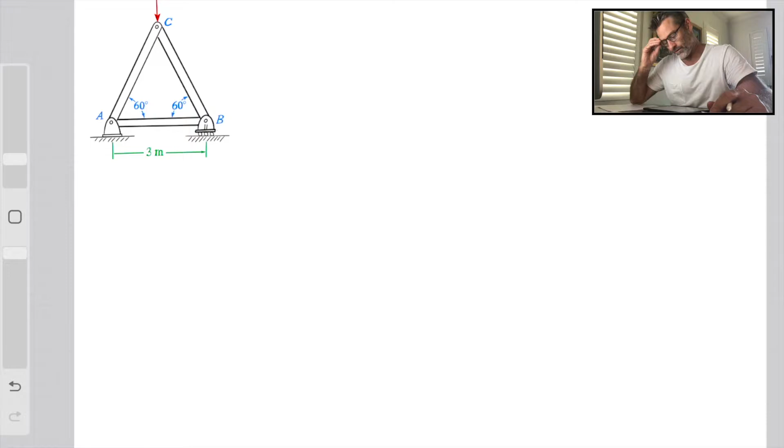G'day all, I've got a question regarding method of joints that I'd like to share with you. Method of joints is just one of those things that it's a process, and if you overthink it, it can become complicated, but if you break it down into steps it's relatively simple and straightforward.

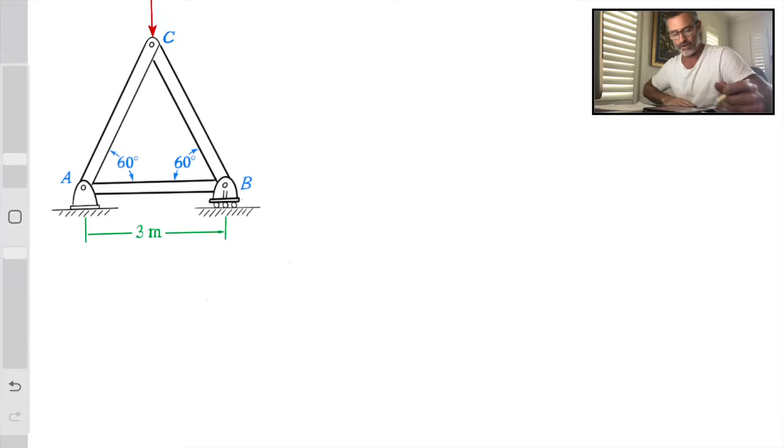I encourage you to just follow the steps that I do when I go about solving these truss problems. The very first thing we do whenever solving these problems is draw a free body diagram. I prepared one here a little bit earlier, so I'll throw that up. And here's our free body diagram.

You can see that we've got the external forces of the truss, BY, AY and AX, and we also have the force from up above, that 3 kilonewton force that's coming down on the center point at the top of the apex of the truss there.

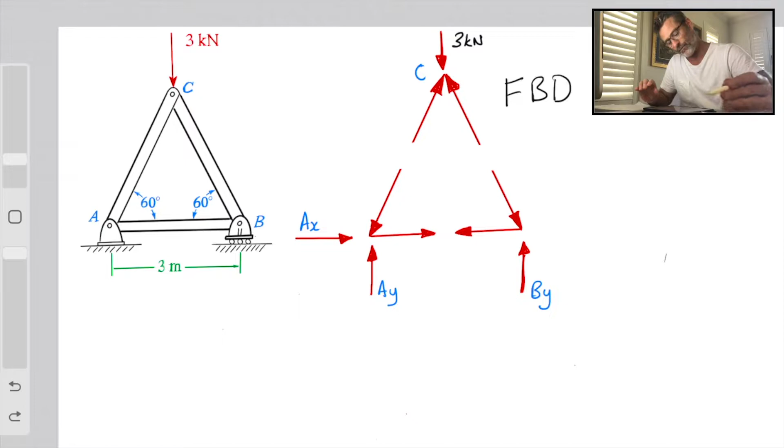But then we've sort of educated guessing, I suppose, what the internal forces of the truss might be doing. If we just have a look at this 3 kilonewton force coming from the top section here, it's pretty easy to identify, well, there must be these other forces here that are pushing back up to counterbalance that, because remember, when we're talking statics, we're talking about equilibrium, nothing's moving, and so therefore if we don't have these counteracting forces, we're going to get movement, and we don't want movement in a static structure.

That's quite important. Coming back down, looking here, we've got our support reactions that come from these supports here. Those support reactions, obviously they're going to be pushing back up, because if we've got the force of the truss, that 3 kilonewton force and other forces pushing back down, then we're going to need these forces here pushing back up in order to maintain that static equilibrium.

I can fairly well assume that we are going to have the forces here going in this upward direction. Coming across here, looking at AX, we see here that we're going to have this pinned joint here, or the pinned support reaction, this fixed support reaction. It's going to have that X and Y force locked.

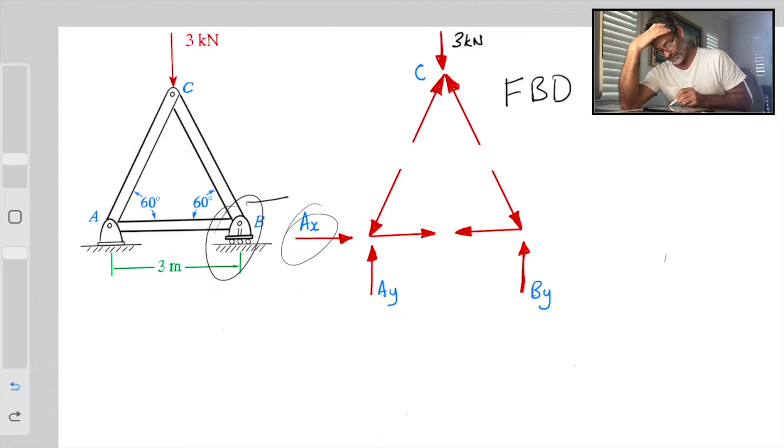When you come over to this one here, we're going to see the B reaction. It's a roller support, so therefore it's going to be allowed to move in this direction and back in that direction. But we are going to have that Y component, or that Y force, that's going to be pushing back up in order to keep it from falling over, or causing some type of catastrophe. So that's what we've got going on.

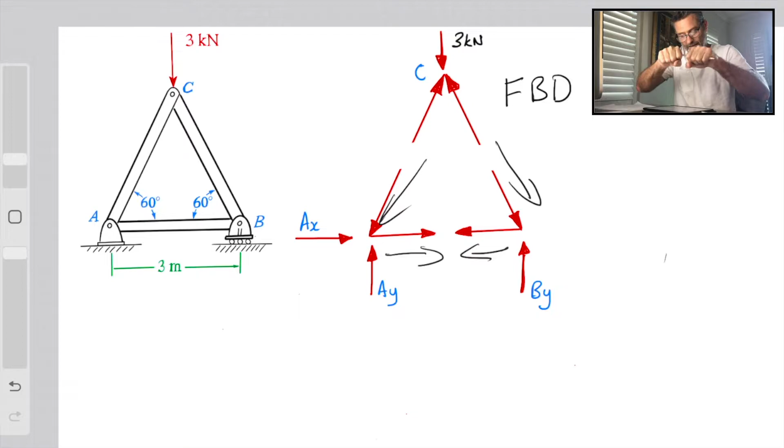And I would think, looking at this, if we have a triangle with forces pushing out here, then you're going to need some sort of tension force here to hold that bottom chord back in, to keep it from spreading apart. And so I've assumed that that's the direction.

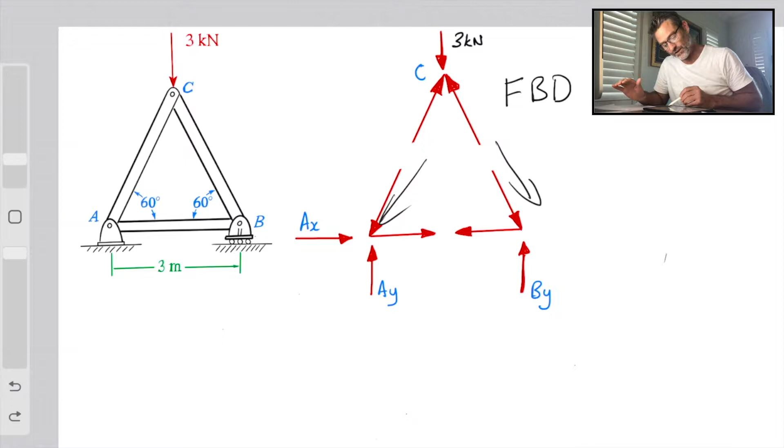Now, if by chance that wasn't to be the direction, that's no big deal, because if we get a negative in the answer, then we know that we just simply need to switch the sense of that direction back around the other way. But I'm fairly confident, looking at this, that that's the way the forces will be acting in this truss.

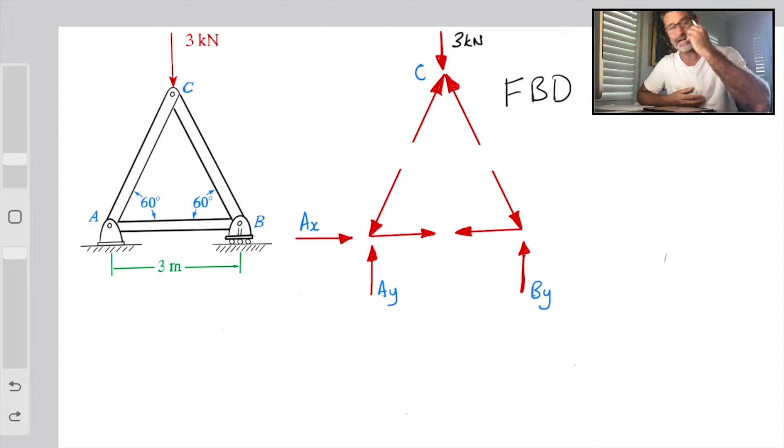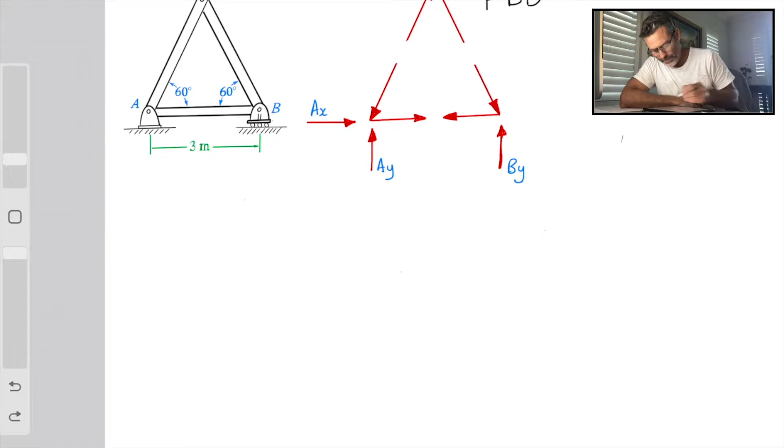Okay, so let's start. We'll go forward now as we're resolving what the support reactions are. That's a pretty straightforward process. So what we're going to do is take moments about point A.

So we're going to sum the moments. I'm going to call it in this positive direction of moments around point A, and we know that it's a static structure, so therefore it is going to be all equal to 0. Okay, so that's pretty easy, that little bit. Now it's doing our moment solutions.

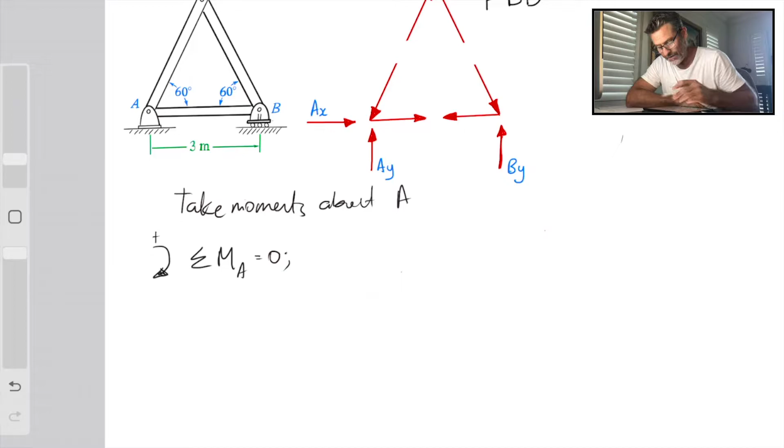We see that we have this force. We can see we've got this 3 kilonewton force up the top here that is acting halfway. So we've got 3 meters across the bottom there, in that bottom chord section. We've got that 3 kilonewton force which is acting halfway along that, which is going to be naturally 1.5. So what I'm going to do here is go, okay, well, we've got the 3 kilonewtons multiplied by our 1.5 meters, and that is going to be causing a positive moment.

Why is it causing a positive moment? Because this is pushing down past here and it's forcing it to go around that way, just like our direction of the arrow symbol that we've put up there. So that's going to be positive.

So I'm going to go minus BY. Again, force times distance is our formula for solving moments. I've got BY multiplied by 3 meters, because that's 3 meters from A that we are taking the moments around. We are going to come up with BY multiplied by 3, and then we have that 3 multiplied by 1.5.

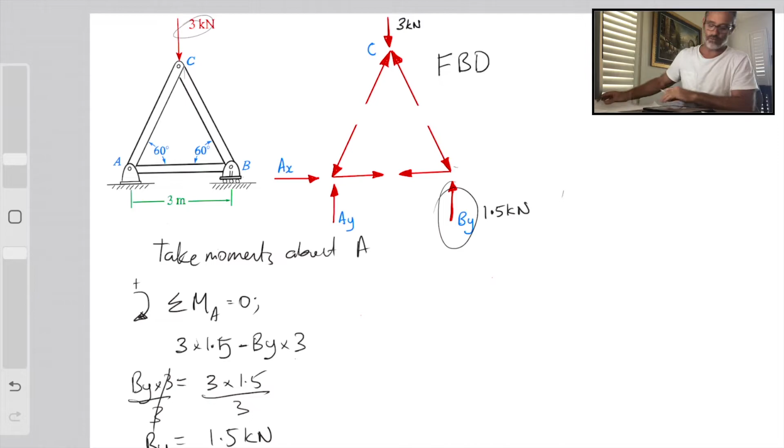Good. Okay, well how then do we come back and solve AY? That's fairly straightforward. We're just going to sum the forces in the Y, our second equilibrium equation. Sum of the forces in Y equals 0. We're simply going to grab our AY, because we're including all of the external vertical forces now. We're only working on the reaction supports.

That's why we're summing just the vertical forces, because obviously we've got this AX here, but that is going to equal 0, because there are no other external forces countering it. So it must be 0. So sum of the forces in Y are going to equal 0.

That means we are going to have AY minus 3 kilonewtons plus the 1.5 kilonewtons. Throw that back around the other side, and we get AY equals 3 kilonewtons minus 1.5 kilonewtons. AY equals 1.5 kilonewtons. So now I've got this one as 1.5 kilonewtons as well.

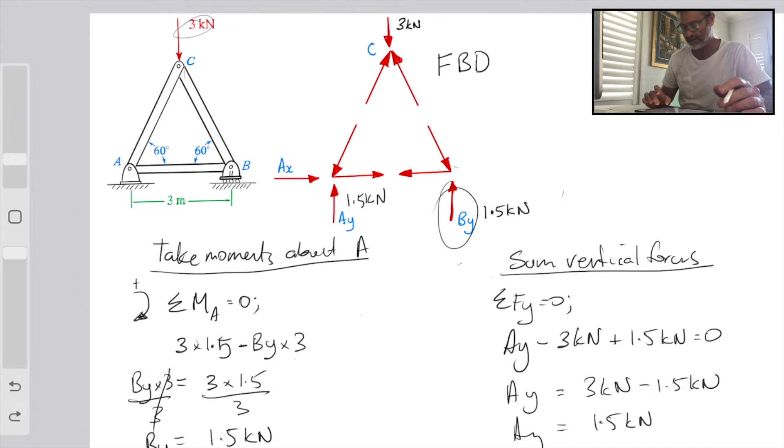And that makes sense, because up the top here you've got 3 kilonewtons pushing down, so the forces pushing back up should be equal to that 3 kilonewtons pushing down. From here on, we know AX is going to equal 0, so we're just going to ignore that, we don't need to consider it any further. But we do want to start solving the internal forces of the members themselves.

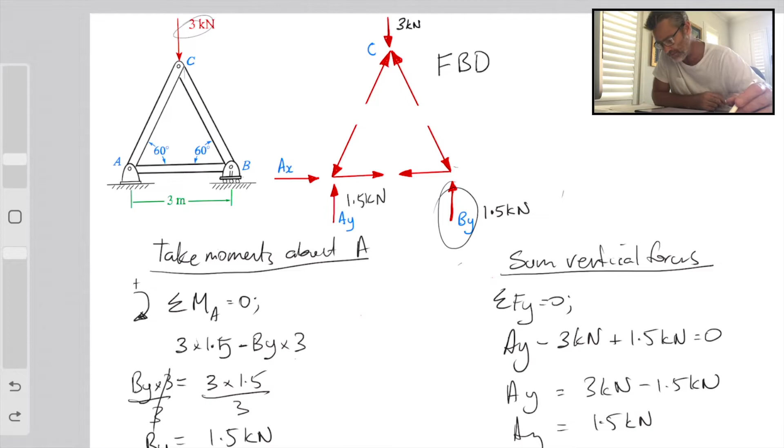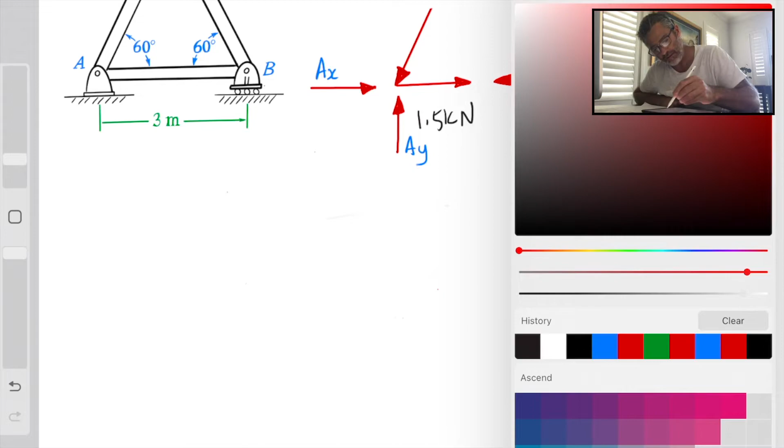Now we've solved those support reactions, we want to go through and solve each of the joints. That's a fairly straightforward process. The first thing I like to do when doing any of these joints is to simply draw my X and Y axes and label where the joints are and the forces are. It just makes it a little bit easier to solve.

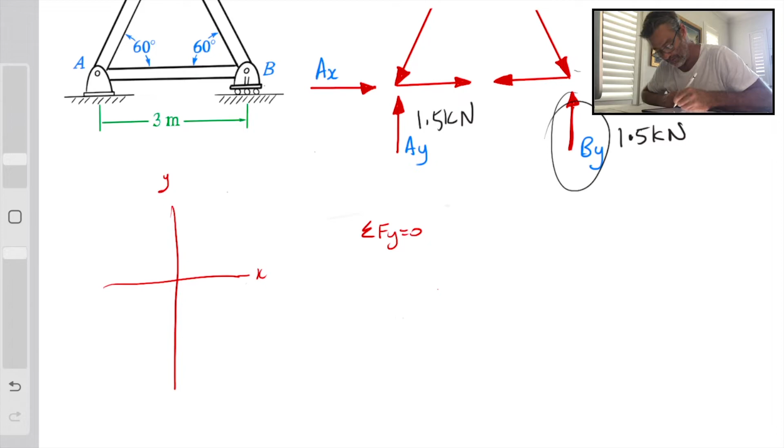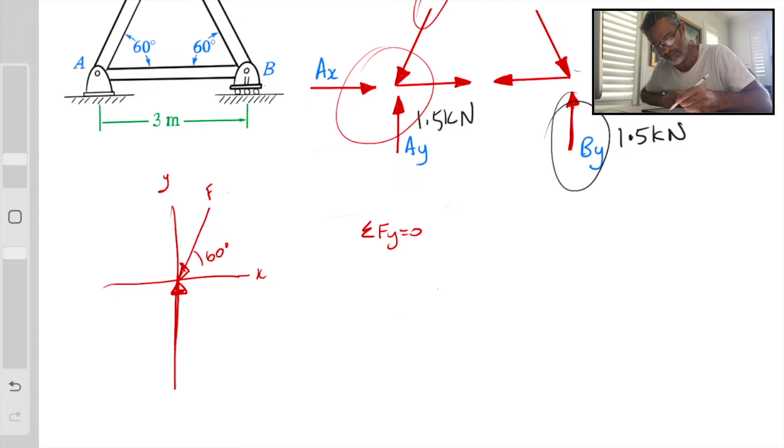So we've got the sum of the forces in Y equals 0. We may as well start with that, because when I look down at this joint A, these are the forces I've got going on: this coming in at 60 degrees. Now that is going to be called FAC, because that member here is A down the bottom and C up the top, so I'm going to label it FAC.

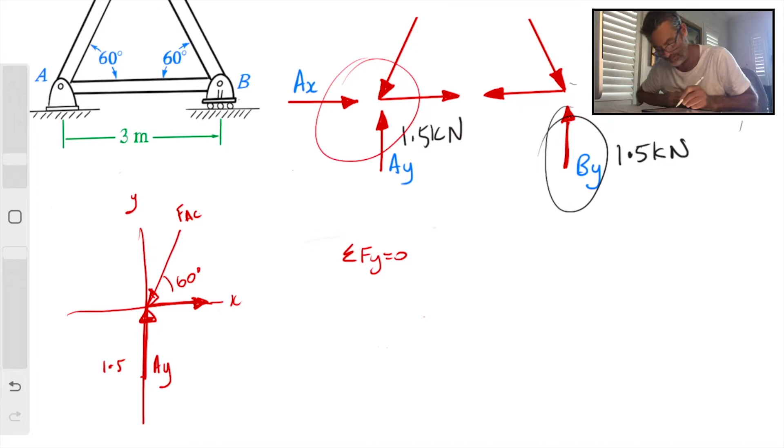This one here, drawn just a moment ago, is AY. We know that is 1.5. And then we have the other force pulling in from the joint, and that is going to be FAC force. The reason we're starting with FY is we already know this Y force, so it's not too difficult to calculate the only other force that has a Y component.

So how do we go about that? Well, it's straightforward as well. We are going to go 1.5 pushing back up, so I've got 1.5. Then I need to take away this FAC, because it's shooting back down, it's in a negative direction. I'm going to take FAC, but only the Y component of that FAC. It's important to recognize that.

So because I'm just taking that Y component, because I'm working in Y here, what I will do is FAC sine 60. Remember, if I'm trying to find a force component and the angle is not between the force component, that is this Y component, and the force itself, then we are going to use sine.

Now, if the angle was here, it's pretty easy to work out. We could say, well, obviously this is 30 degrees here, and if it was here, we could cos that 30 degrees. We'll take it as if, no, there's nothing there, we won't do that extra working out. We'll just simply say there's no angle here. So because there's no angle between the force and the force component we're trying to find, we are simply going to sine it. So 1.5 minus FAC sine 60, and that is all the forces we have in the Y direction.

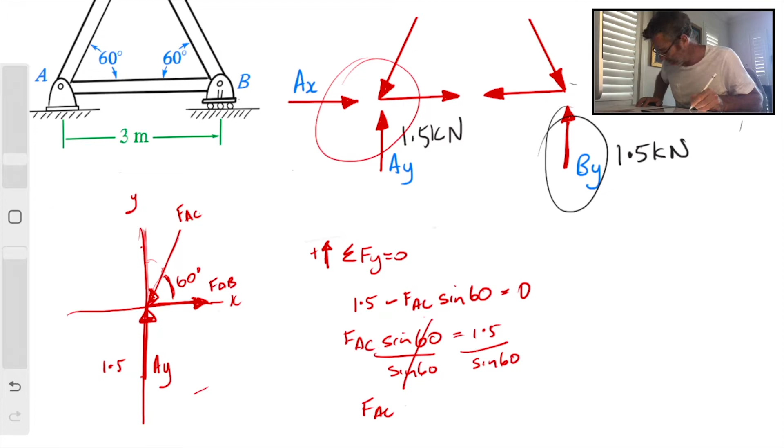FAC is going to equal 1.732 kilonewtons. So straight away, I can write in FAC here. This one is 1.732. Is there anything else we need to solve?

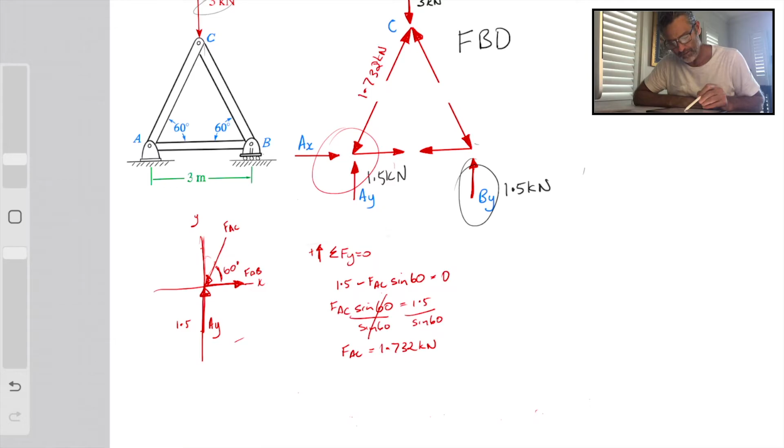Yes, there is. We want to solve the x components as well, so that means we're going to find out what FAB is here in a moment. Sum of the forces in the x equal 0. There's two x forces: FAC cos 60, because it's coming down at that angle, at that 60 degree angle, and we're going to cos it because it's pushing back that way. That's going to give us the x component of that angle.

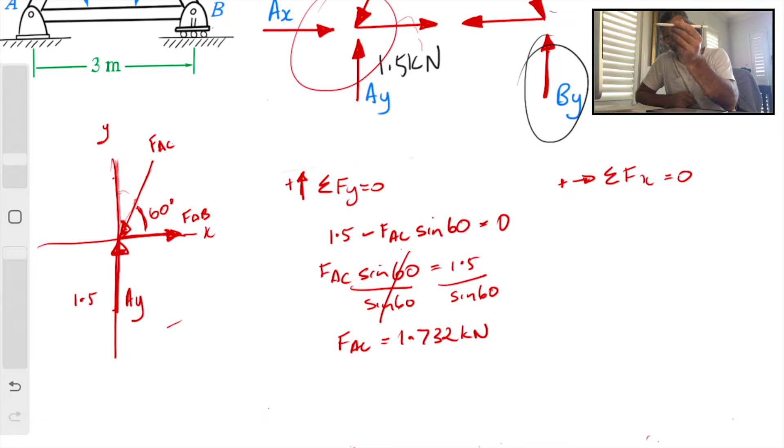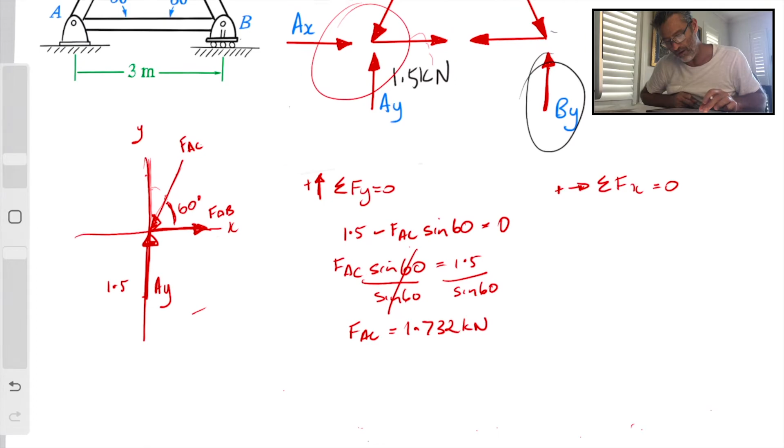Because that's pushing out towards the outside of the truss, the internal member must be pulling back in to counteract that. So let's go ahead and do that. FAC, we now know what FAC is, and that's 1.732. So we'll go 1.732 cos 60, and since it's pushing back in the negative, make sure we put that negative in there. And then we've got FAB pushing in the positive direction, so that's going to be positive.

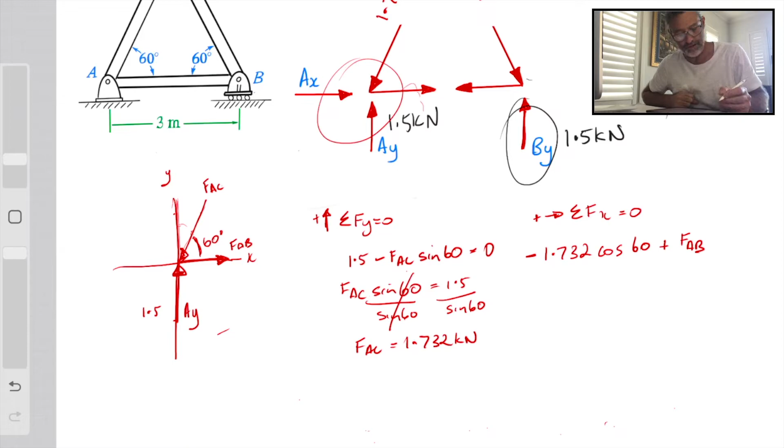So what do we do? We simply put FAB out in front, throw all this over the other side, and we will have our answer. FAB is going to be 0.866. Simple as that. Come back up to the top here, just write this in: 0.866.

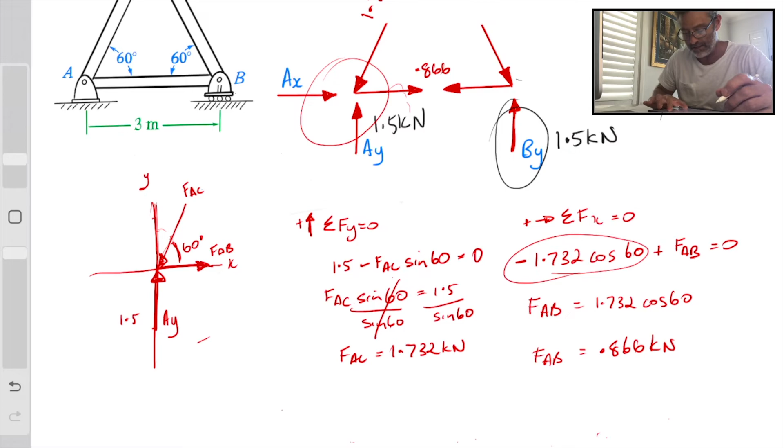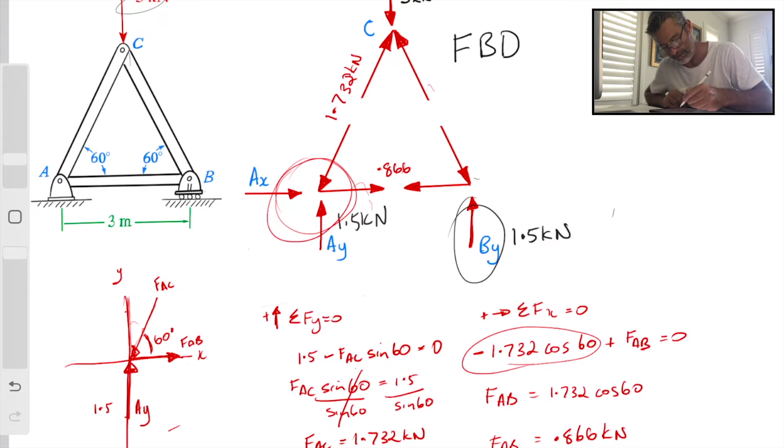So looking at this now, all we've got left to solve is this member here. This is just joint A we've been at so far. Let's tick that, that's done. We can now come down and do joint C. You're going to see that with this problem, we're actually going to solve it without having to visit that last joint, because we're going to be able to get all our workings from looking at joint C.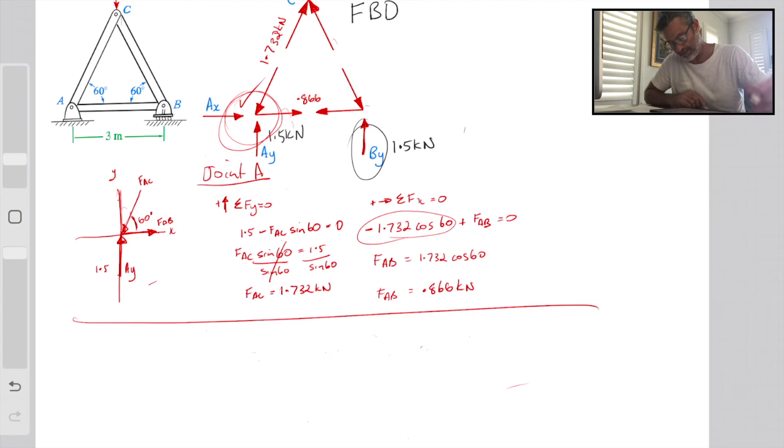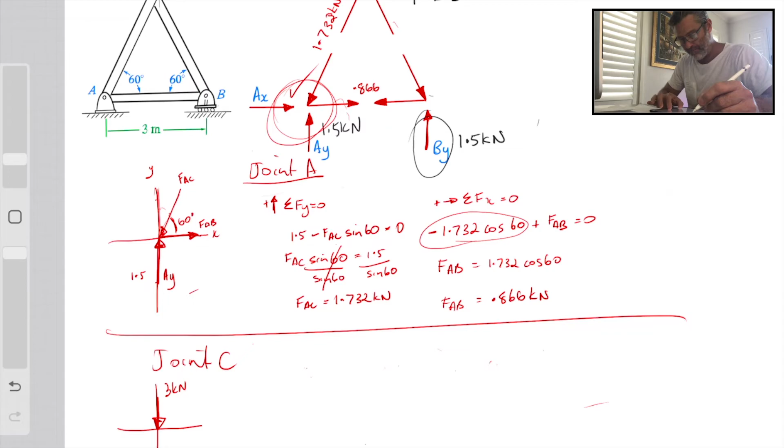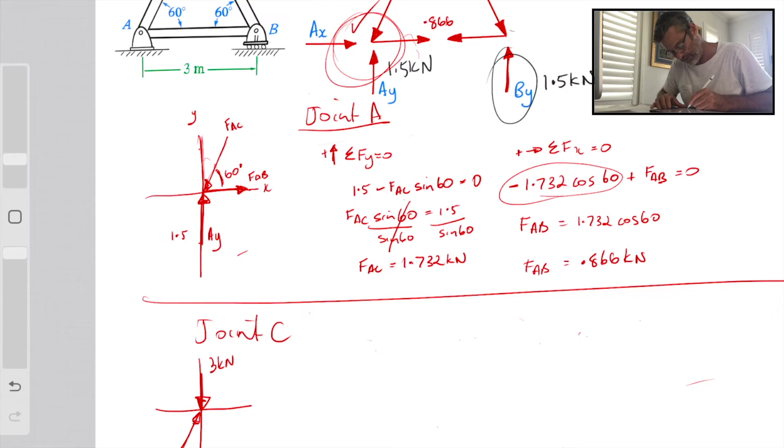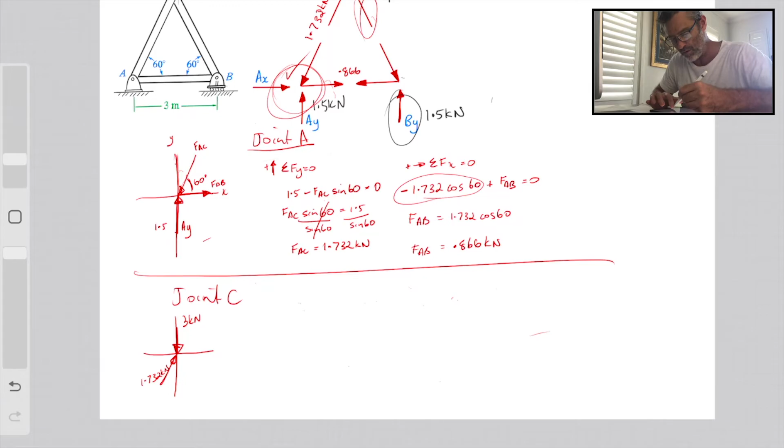So let's get our joint C, put our little x and y in. This one coming down here is 3 kilonewtons. The FAC is coming up like so, and that is 1.732. Then the last one we have is going to be this one here, which we can call FBC. FBC is going to be pushing back up in order to counteract this 3 kilonewtons pushing down, so FBC is coming back up.

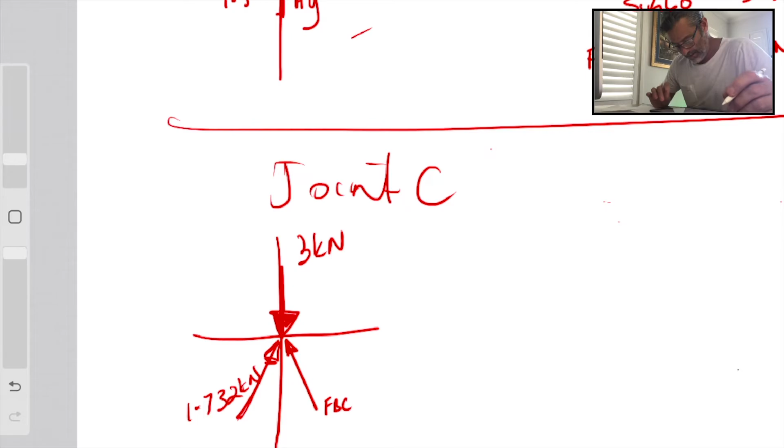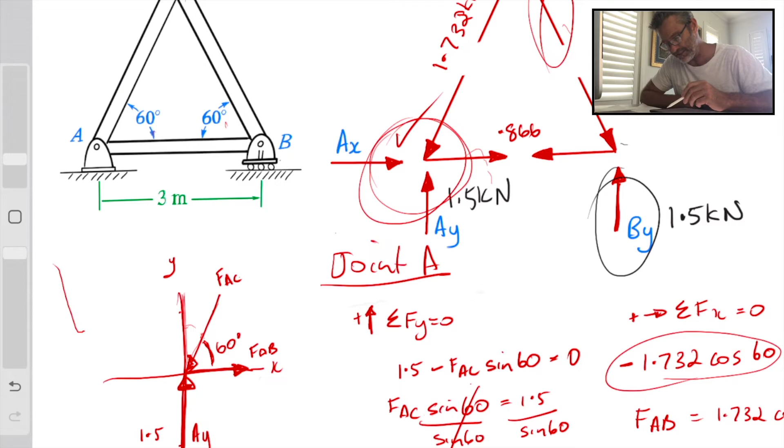Now, we're told we've got 60 degrees here at A and B, and obviously for the triangle's 180 degrees, we know that's going to be 60 degrees up here as well. This whole lot's 60, but if we're working just on this section here, it's half of that, so we've got 30 degrees we're going to be concerned with. I'm just going to write in there 30 degrees.

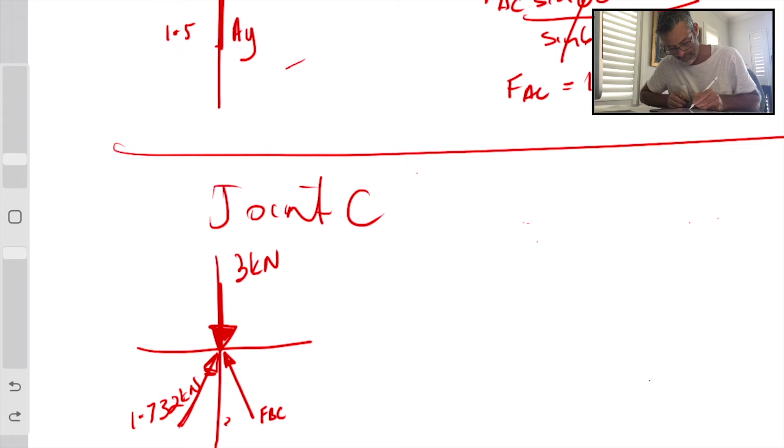We might as well go and find our vertical components. So let's sum, remember positive, sum of the forces in our y equals 0. We're going to come through adding all our forces together: 1.732 of this one here, but that's going to be cos 30, pushing up because we're only after the y component. So cos 30. Then we're going to minus 3 kilonewtons, that's coming straight down, so we don't have to sine or cos that one.

And then we come across to FBC, and that is going to be positive y because it's pushing in that positive y direction, plus FBC cos 30. Because we're going to bring that FBC back to that point, we want to find the y component of that FBC that is entirely on that y-axis, and so that's why we cos that 30, and then that's going to equal 0.

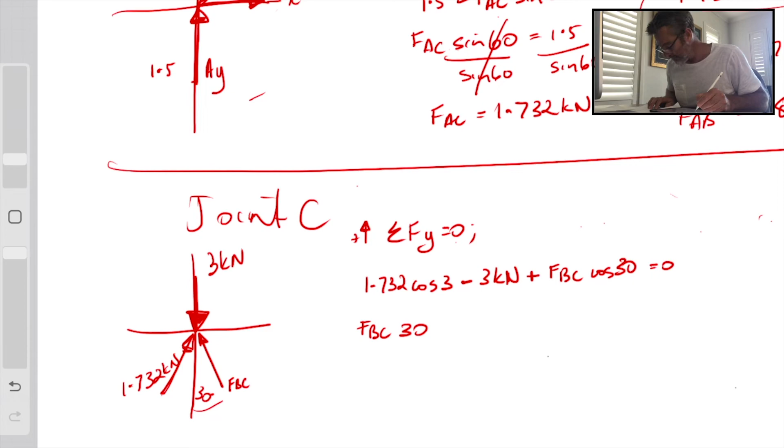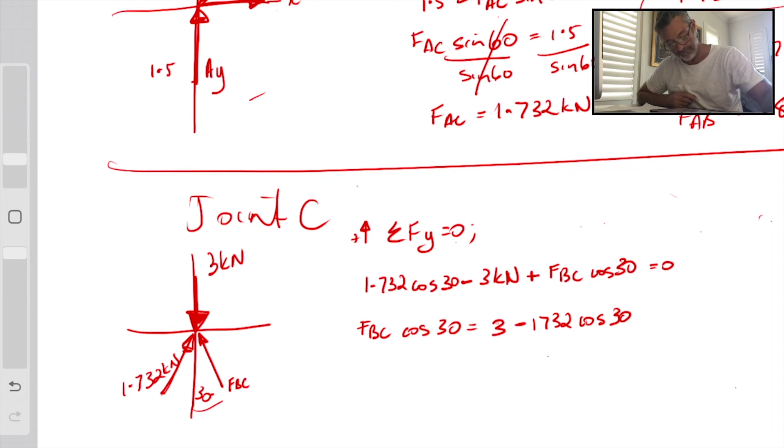I would bring FBC over to this side. Let's just bring that all back and make that nice and neat: FBC cos 30 equals... let me just put that cos 30 in there. Cos 30 equals, we are going to have that 3. We're going to throw it back to this side, so because we're putting it over the other side, we need to change the sense, change that negative into a positive. Then we're going to minus 1732 cos 30.

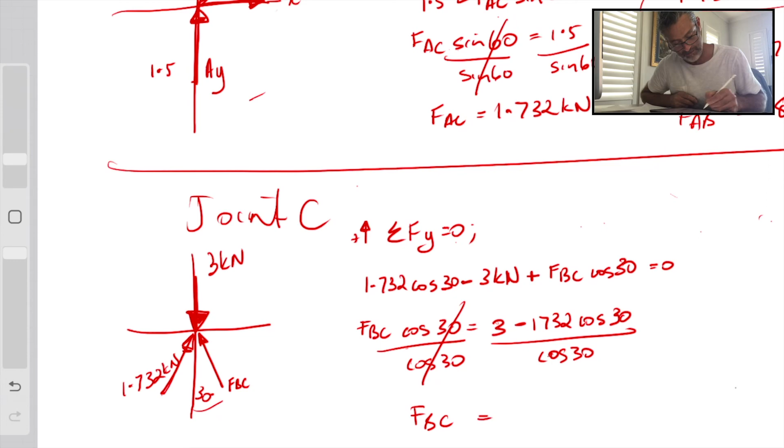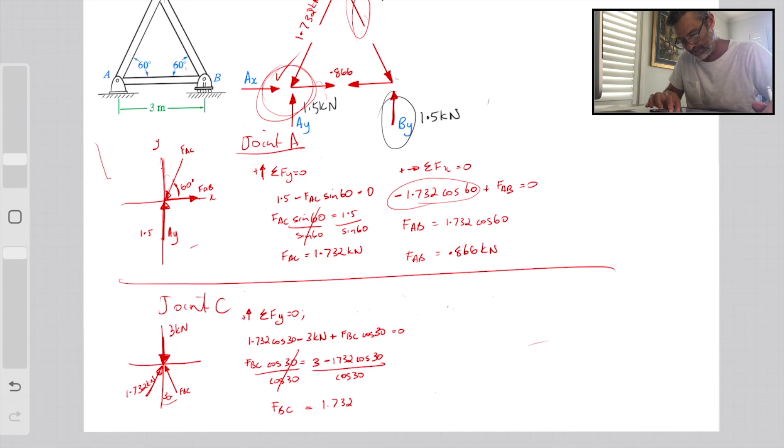1732 cos 30, and let's get rid of this cos 30 so we get FBC by itself. We're going to have to divide it by cos 30 over here, and that is going to be FBC equals 1.732. So basically we can go back and we can hit our FBC, and we know that is now 1.732 kilonewtons.

And you can see now we have solved FBC, we've solved FAB, we've solved FAC, we've got our reactions, and that's the question all over and done.

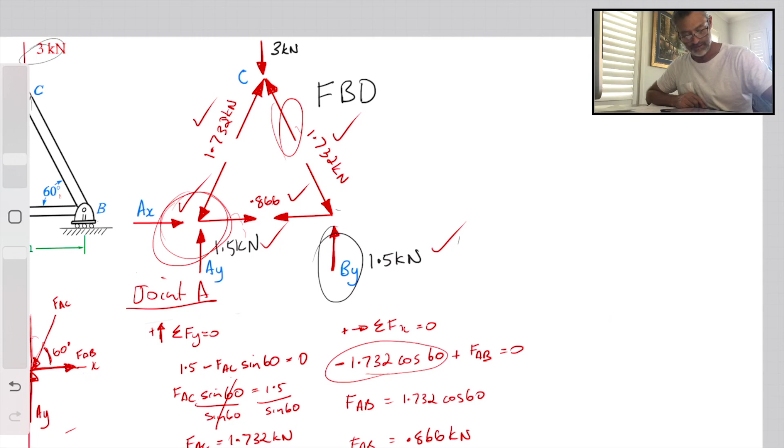I hope you found that fairly straightforward. Do watch it over again. It's one of those things, method of joints, you do need to keep watching it and really pick up what's going on. Once you get that in your mind, the process becomes just a matter of that, a process to solve future questions.